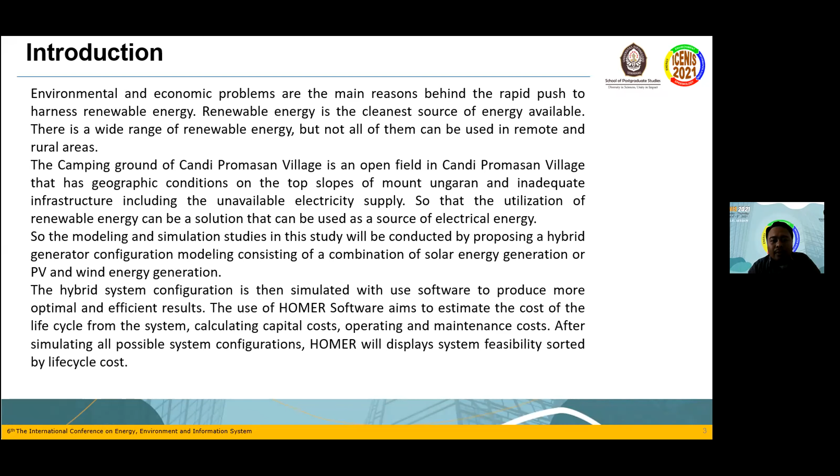The first introduction. Environmental and economic problems are the main reason behind the rapid push to harness renewable energy. Renewable energy is the cleanest source of energy available. There is a wide range of renewable energy, but not all of them can be used in remote and rural areas.

The camping ground of Candi Promasan Village is an open field that has a geographic condition on the top slope of Mount Ungaran and inadequate infrastructure, including unavailable electrical supply. So the utilization of renewable energy can be a solution that can be used as a source of electrical energy.

So the modeling and simulation studies in this study will be conducted by proposing a hybrid generator configuration consisting of a combination of solar energy and wind energy generation. The hybrid system configuration is then simulated with software to produce a more optimal and efficient result.

In this study, the research method used is first the electrical load study: survey data on electrical load profile including daily electrical loads and equipment load.

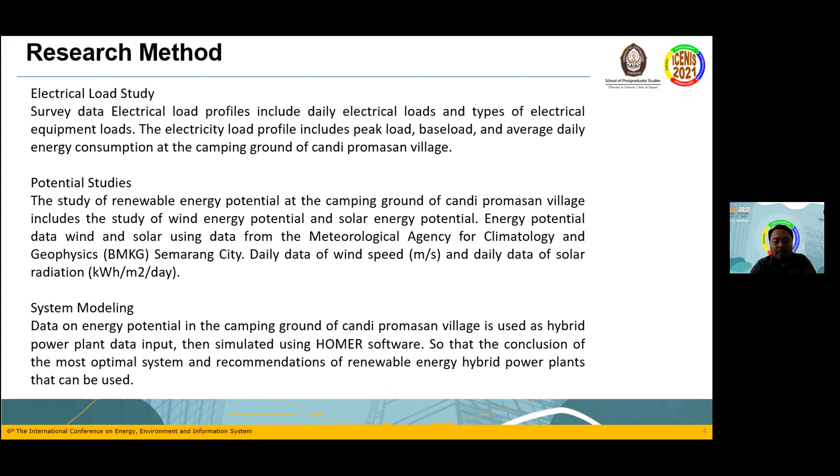Then the potential at the camping ground of Candi Promasan, including solar energy potential, was simulated using Homer software.

Result and discussion. First, the hybrid power generation system. The picture shows the hybrid generation system in Homer software. In the modeling, there are several components used as input data, namely daily load data, PV module, wind turbine, battery, and inverter.

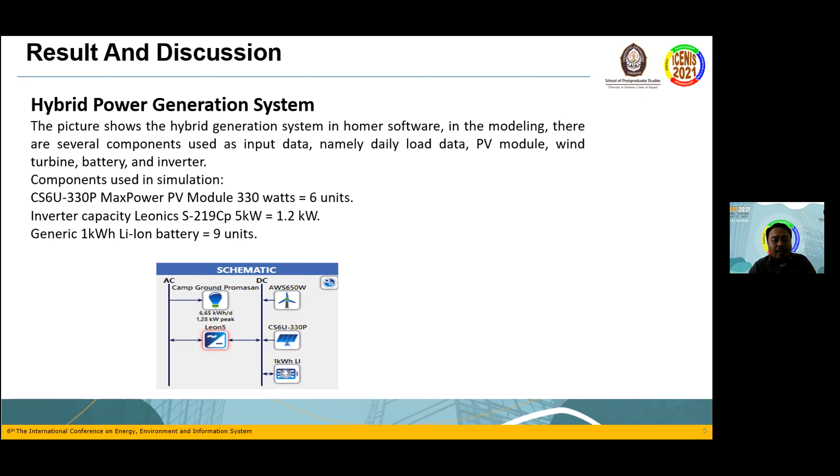Load profile: the image shows daily load data with an average daily load of 6.65 kilowatt hours and a daily peak load of 1.28 kilowatt. The annual load requirement is 2,427 kilowatt hours per year.

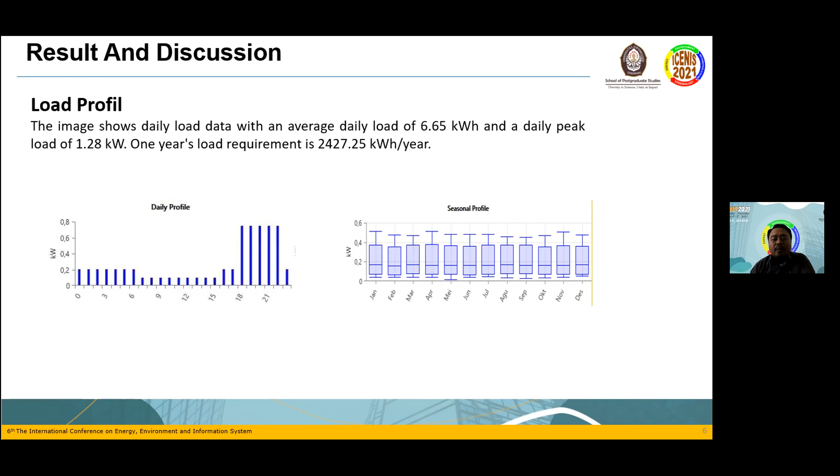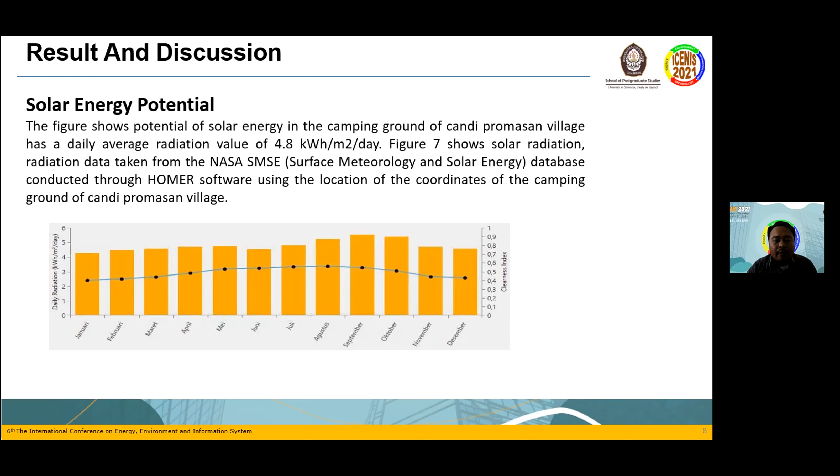Solar energy potential: the figure shows the potential of solar energy in the camping ground of Candi Promasan, with a daily average radiation value of 4.8 kilowatt hours per meter square per day.

Electric energy production: the figure below shows the best result obtained by Homer software, where the electricity supply uses 100% PV. The electricity generated by PV for 1 year is 6,247 kilowatt hours, so it can supply an annual load requirement of 2,427 kilowatt hours per year.

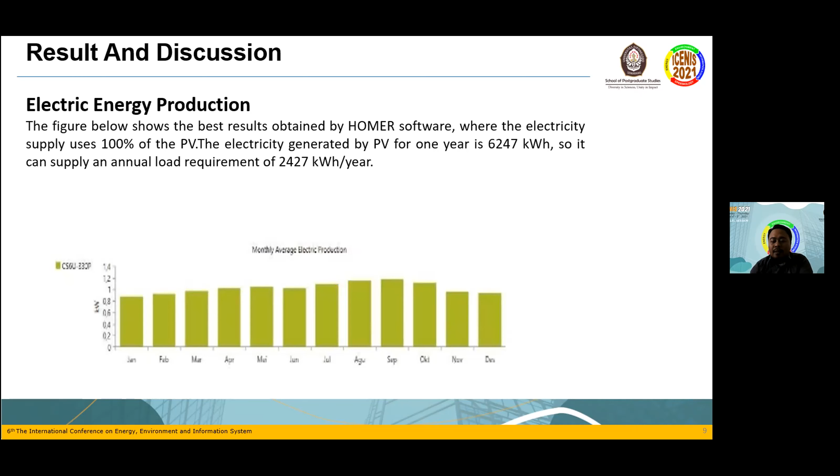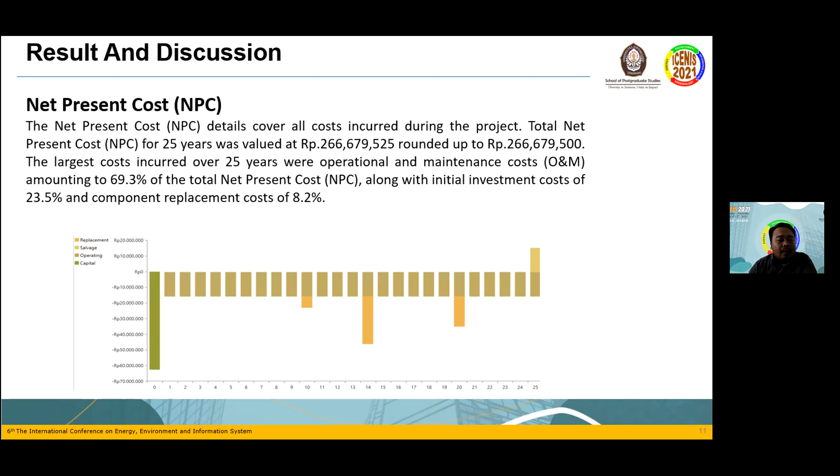Net present cost (NPC): the net present cost calculation covers all costs incurred during the project. Total net present cost for 25 years includes large costs where operational and maintenance costs amount to 69.3%, along with initial investment cost of 23% and component replacement cost of 8.2%.

Conclusion: the most optimal system for fulfillment of electrical energy needs in the camping ground of Candi Promasan village uses 100% of the PV system to meet the needs of electrical energy needed. The components required are 6 PV module units, an inverter capacity of 1.2 kilowatts, and 9 battery units.

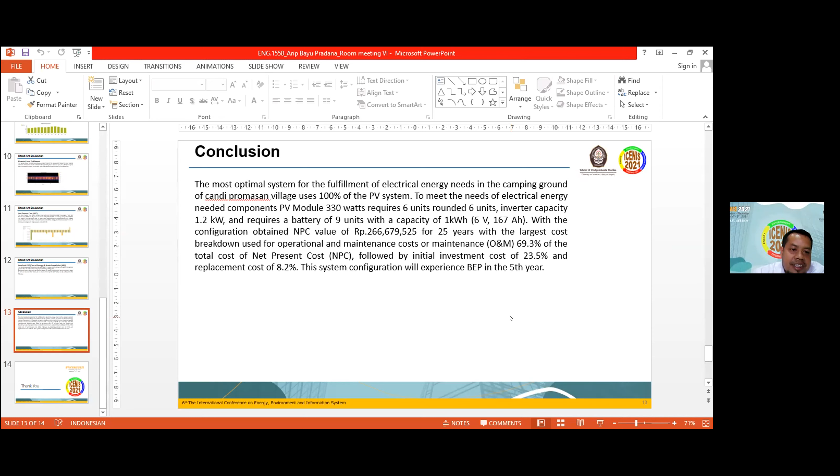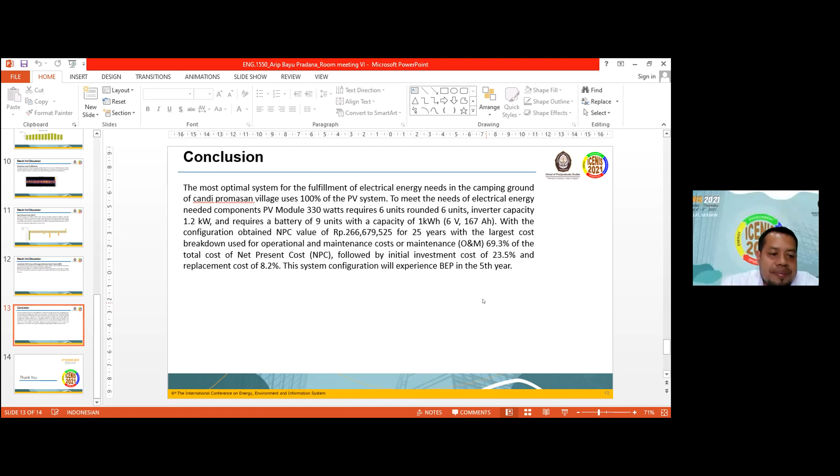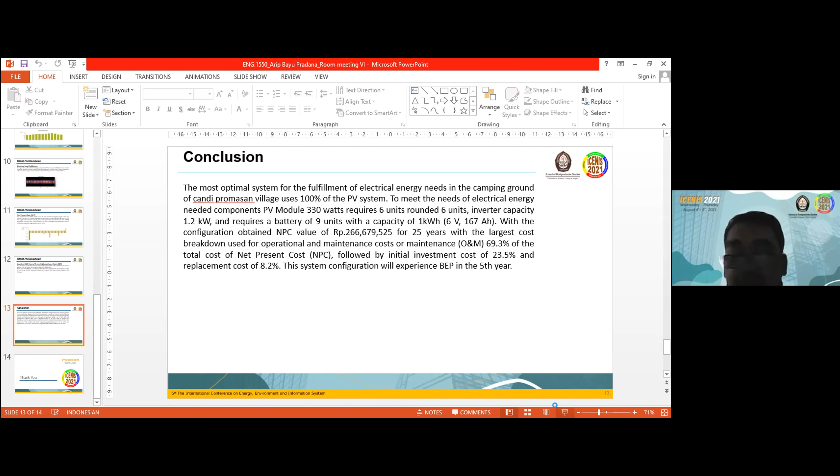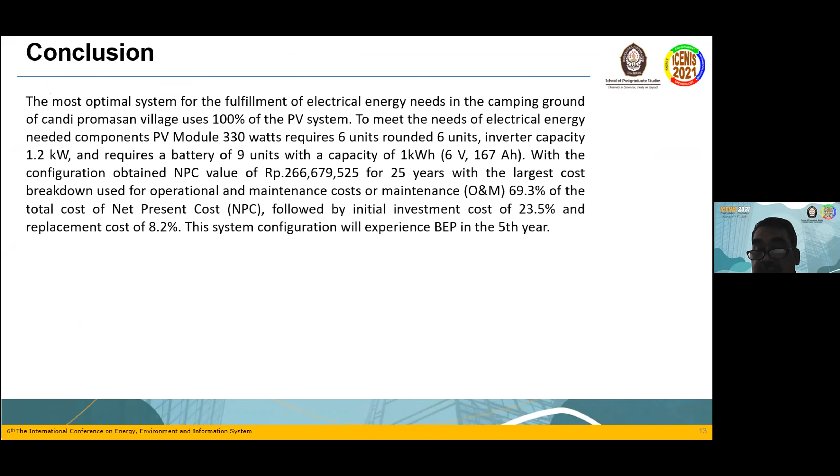Is the research still using the software simulation, not implemented yet? Not yet, I'm simulating in software. So maybe if implemented there may be a difference between the actual and the simulation output.

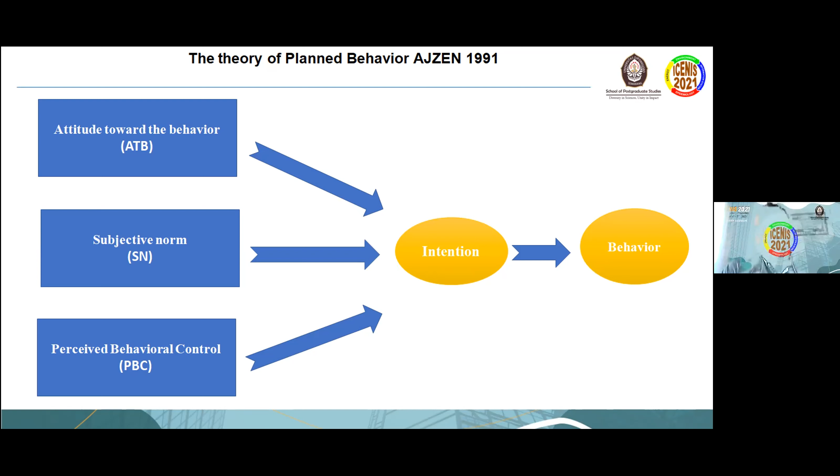The third predictor of intention is perceived behavioral control, which simply means the ability or perceived ability, ease or difficulty of performing a certain behavior.

We adopted this theory to explore farmers' intention to use energy saving settings, but we adapted this model by incorporating a fourth factor, which is environmental awareness.

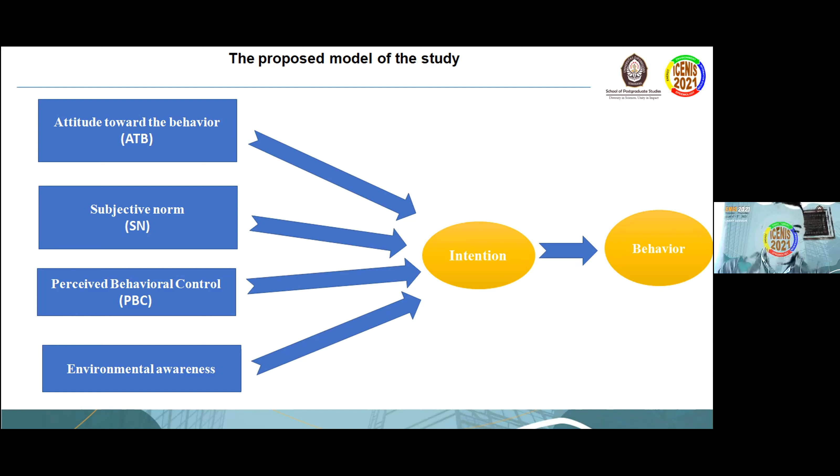To fulfill the purpose of the study, we hypothesized the following: attitude has a positive influence on farmers' intention to save energy.

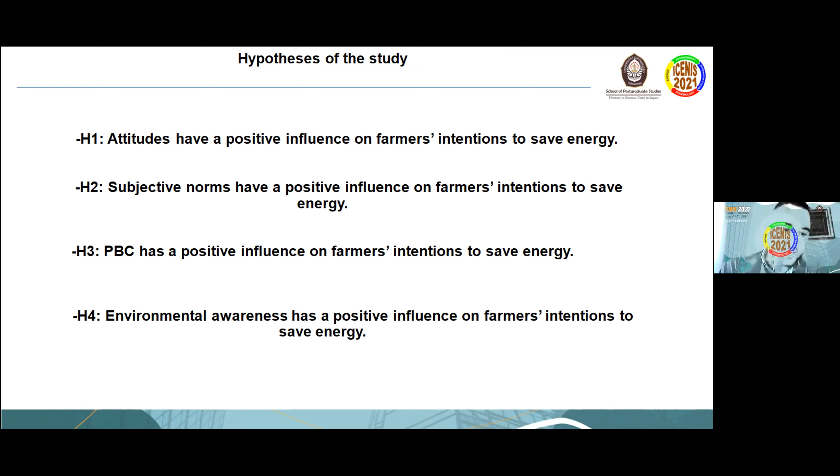Second, we suppose that subjective norms have a positive influence on farmers' intention to save energy, as does perceived behavioral control. Finally, environmental awareness has a positive influence on farmers' intention to save energy.

For the research methodology, data were collected through a self-administered questionnaire using the convenience sampling method. The population of the study includes landowners and land rental farmers in five of the most important Algerian provinces in terms of agricultural production. Data were collected from January to April 2020.

384 questionnaire copies were distributed through direct interviews and with the help of agricultural equipment retailers. We were able to retrieve 323 copies, of which 10 were found incomplete. So the analysis was ultimately conducted on 313 questionnaires, since the incomplete copies were excluded.

Results of the study: we found that a positive attitude toward energy saving behavior plays a significant role in forming energy saving intention. We also found that people who have influence on farmers, such as family, friends, and senior farmers, whose opinions and experience are appreciated and respected, exert a significant impact on farmers' decision to adopt energy saving settings.

We also found that perceived control is positively and significantly correlated with the intention to adopt sustainable agricultural practices. Finally, environmental concerns and awareness have a positive influence on farmers' intention to adopt energy saving settings.

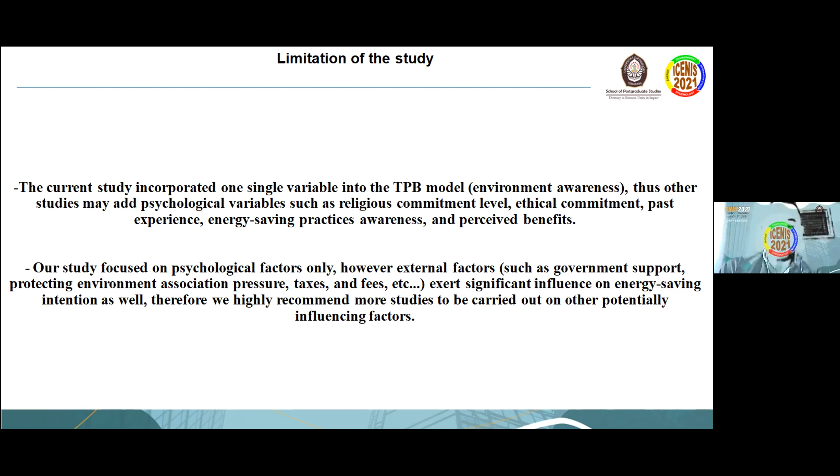However, external factors such as government support, environmental protection association pressure, taxes and fees exert a significant influence on energy saving intention as well. Therefore, we highly recommend more studies to be carried out on other potentially influencing factors.

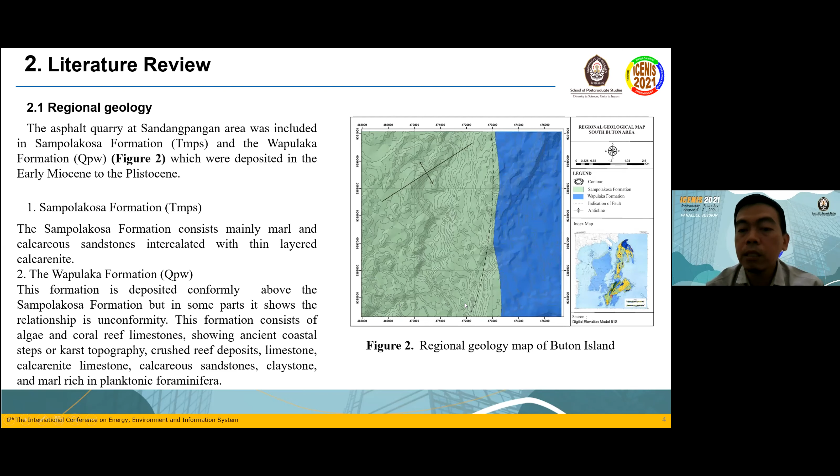This is the research area location. Then the literature review: first is regional geology. The asphalt quarry at Sandangpangan area is included in the Sampolakosa Formation and the Wapulaka Formation. The Sampolakosa Formation consists of marl, calcareous sandstone, intercalated with thin-layered calcarenite, while the Wapulaka Formation consists of algal and coral reef limestone, crushed reef deposits, limestone, calcarenite limestone, calcareous sandstone, claystone, and marl rich in planktonic foraminifera. This is the regional geology map of Buton Island.

The second topic is asphalt types. Asphalt are the varieties of naturally occurring bitumen. Asphalt are also produced as a petroleum byproduct. Based on where it is obtained, asphalt can be divided into two types: there is natural asphalt, which is obtained somewhere in nature and can be used directly or with light processing, and the second is oil asphalt, which is the residue of petroleum distillation.

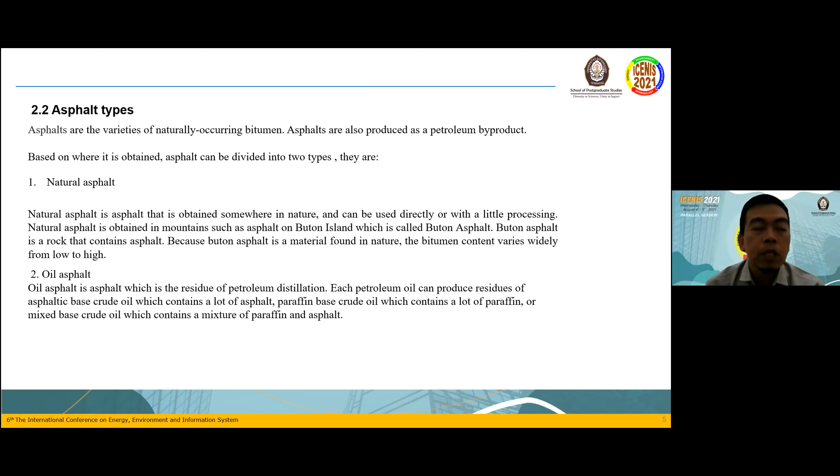Methodology. The methods used in this research are Soxhlet extraction, X-ray fluorescence (XRF) analysis, and petrographic analysis. Soxhlet extraction has traditionally been used for a solid sample with limited solubility in a solvent in the presence of insoluble impurities. This method was used to determine the bitumen and moisture content in Buton asphalt, while XRF was carried out to determine the chemical composition of rocks.

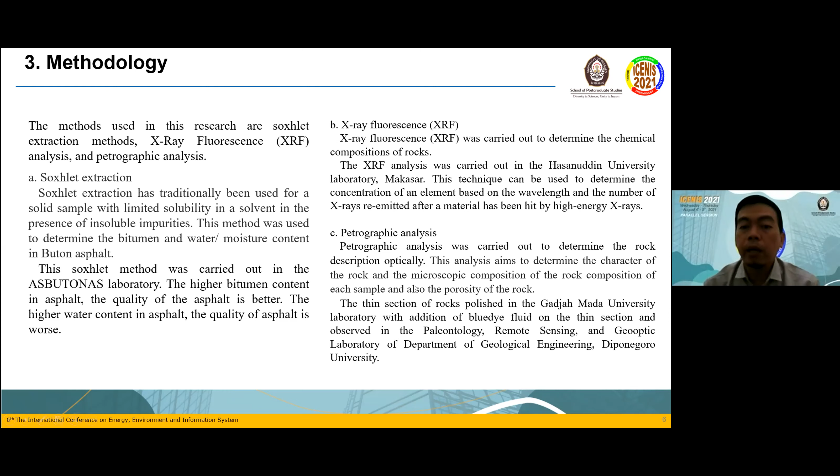Petrographic analysis aims to determine the character of the rocks and the microscopic composition of each sample, and also the porosity of the rock.

Result and discussion. The first is lithology. The lithology in the research area is limestone, which consists of calcarenite limestone from the Sampolakosa Formation, and bioclastic limestone and semi-crystalline limestone from the Wapulaka Formation.

Then bioclastic limestone. The bioclastic limestone covers about 10% of the research area, and from petrographic observation, the bioclastic limestone has porosity of about 5%, and it is filled with black asphalt.

Then the last is semi-crystalline limestone. Semi-crystalline limestone covers about 40% of the research area, and from petrographic observation, the semi-crystalline limestone has porosity of about 10%, which is filled with black asphalt.

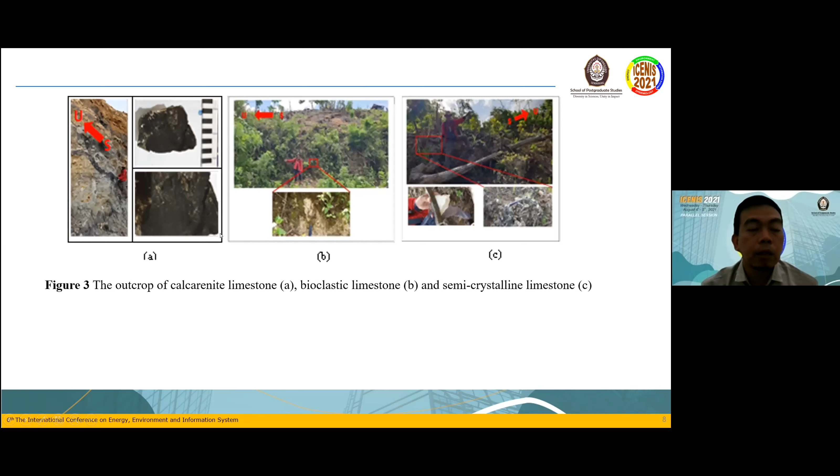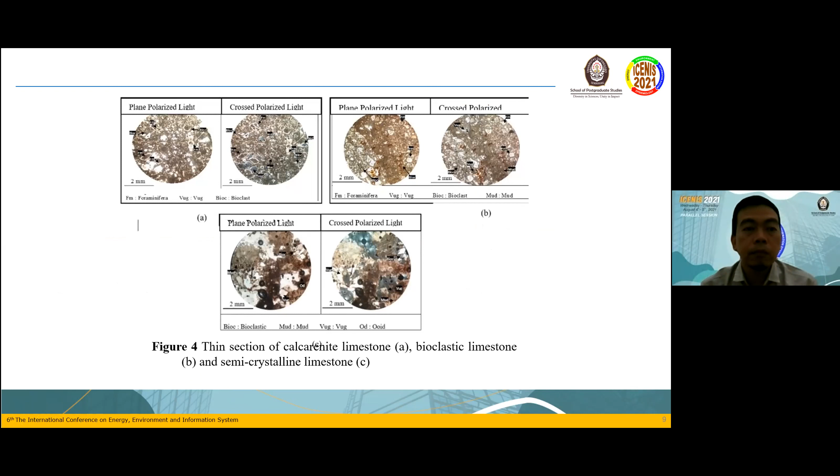This is the picture of the calcarenite limestone, bioclastic limestone, and semi-crystalline limestone, and this is the petrographic analysis from the rocks. Then the asphalt quality of the research area.

The determination of asphalt quality in the research area, based on the result of bitumen and water content tests, XRF analysis, and petrographic observation of the asphalt-bearing rocks, can be seen in Table 1.

These are 3 types of lithology: calcarenite limestone, sample number 1, 2, and 3; then bioclastic limestone, sample number 4 and 5; and semi-crystalline limestone, sample number 6. And this is the bitumen content, water content, CaO content, and porosity of each rock.

The discussion: the bitumen content. The bitumen content of the asphalt-bearing rock is analyzed with the Soxhlet method, and based on Badan Standarisasi Nasional, rocks with bitumen content of 18 to 24% were categorized as good.

And the rock in the research area, sample number 2 and number 3, which are calcarenite limestone, have the highest bitumen content compared to other rocks, bioclastic limestone and semi-crystalline limestone.

Then the water content: based on Badan Standarisasi Nasional, rocks with water content less than 16% were categorized as good, and all samples from the research area have less than 16% moisture content. So the water content of Buton asphalt is very, very low.

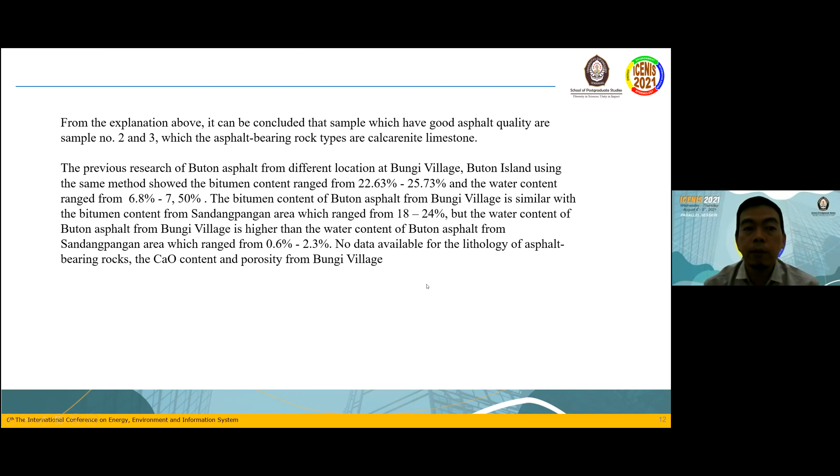Conclusion: the lithology of the research area is limestone, which consists of calcarenite limestone, bioclastic limestone, and semi-crystalline limestone. The bitumen content of calcarenite limestone is 4.5 to 38.5%, bioclastic limestone is 3.8 to 14.6%, and semi-crystalline limestone is 14.6%.

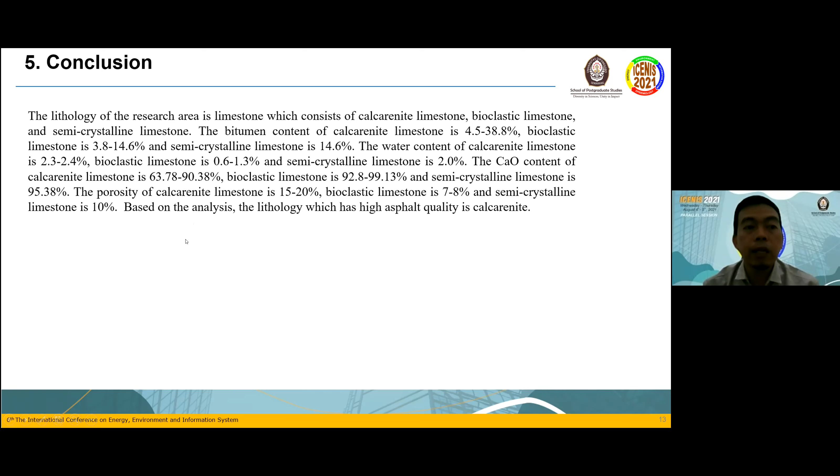The CaO content of calcarenite limestone is 63.78 to 90.38%, bioclastic limestone is 92.8 to 99.13%, and semi-crystalline limestone is 95.38%. The porosity of calcarenite limestone is 15 to 20%, bioclastic limestone is 7 to 8%, and semi-crystalline limestone is 10%.

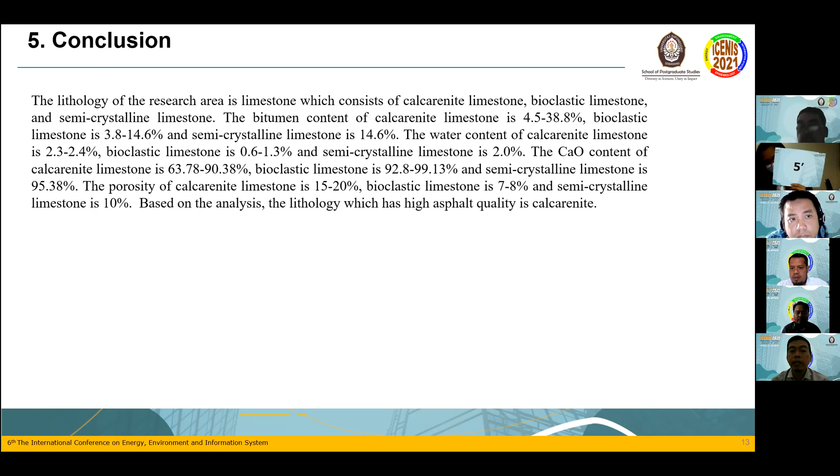Based on the analysis, the lithology which has high asphalt quality is calcarenite limestone. And this is the references we used in this research. Thank you.

Thank you very much, Mr. Triwinarno, for your presentation. It is very good research on the asphalt at Buton Island. Maybe any question or suggestion from the participants?

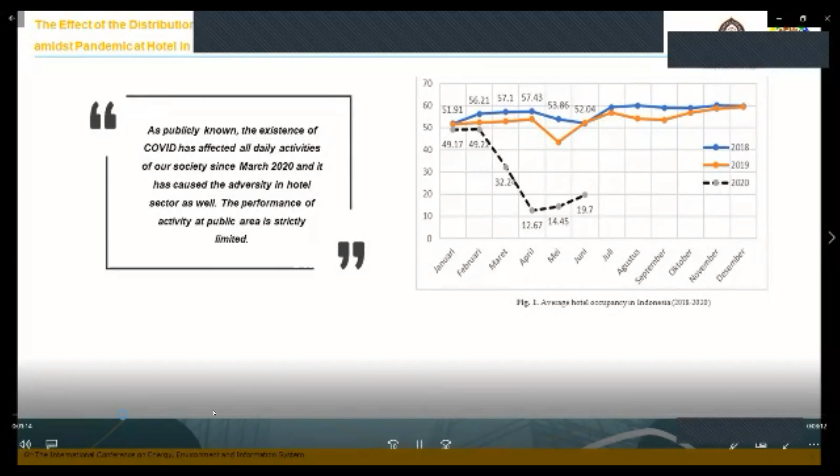Thank you. According to statistical data, the hotel condition in each province has not much difference, like the occupancy profile of star hotels in Central Java province, which has decreased by an average of 18.7% in 2020 compared to the occupancy rate in 2019 and 2018.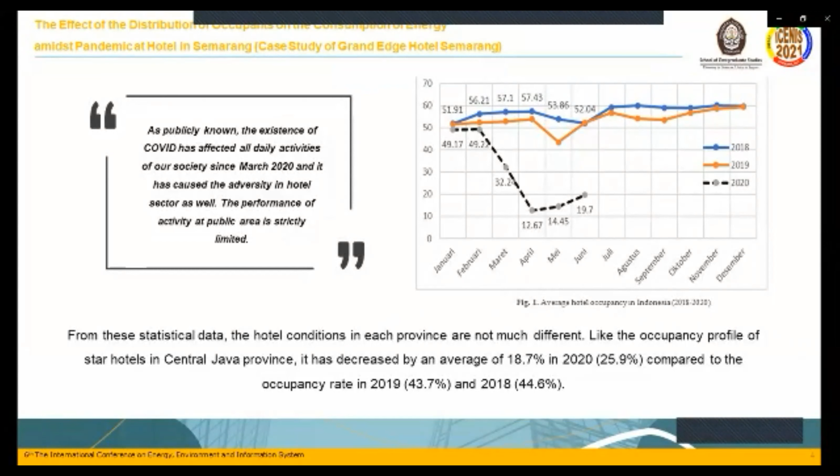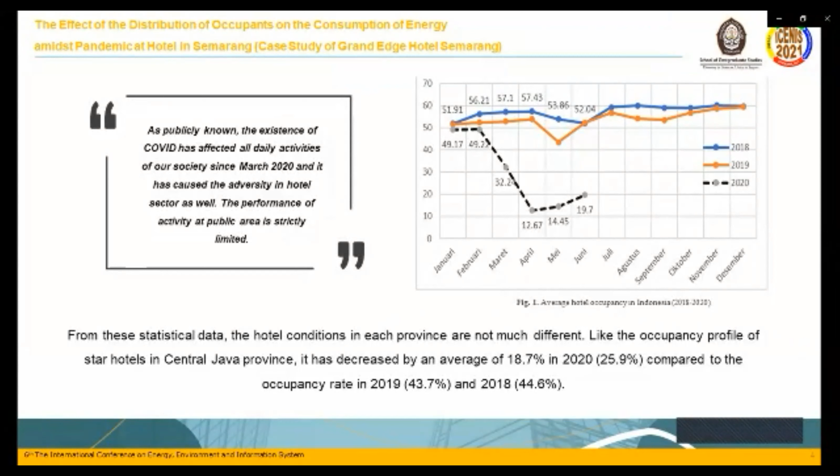Of course, a low occupancy rate will result in an imbalance between operational costs and hotel revenues. By trying to stay operational, hotels will suffer a lot of losses. Hotel management policies are of course inseparable from consideration of the efficiency and effectiveness of all aspects of hotel management, such as energy costs.

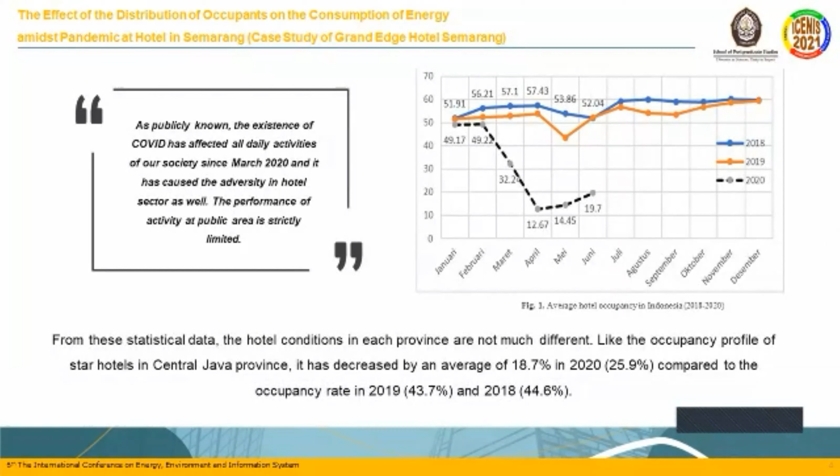There are 4 groups of variable use, namely energy, hotels, COVID, and tropical climate. Finally, the 2 main objectives in this discussion are the profile of energy consumption before and during the pandemic in hotel buildings, and whether there is any relationship between climate aspect, morning sunlight, and the choice of hotel room location.

To meet the above objectives, we carried out direct field measurements from January 2019 to December 2020 and used secondary data on visitor profiles as well as mathematical calculation of their energy consumption. This means there were 3 groups of steps we took in obtaining the field data: analysis of hotel room user profiles, energy use analysis, and analysis of the choice of hotel room location during a pandemic.

This means there were 4 groups of steps we took in obtaining the field data. First, building energy data. Second, hotel building physical data. Third, non-physical data of hotel buildings. Fourth, hygrothermal profile based on room location orientation.

The object of this observation is Grand Edge Hotel, located on Sultan Agung 96, Semarang. This hotel building has a principal orientation toward the west, with the main entrance on the west side and side entrances on the south and north sides of the building.

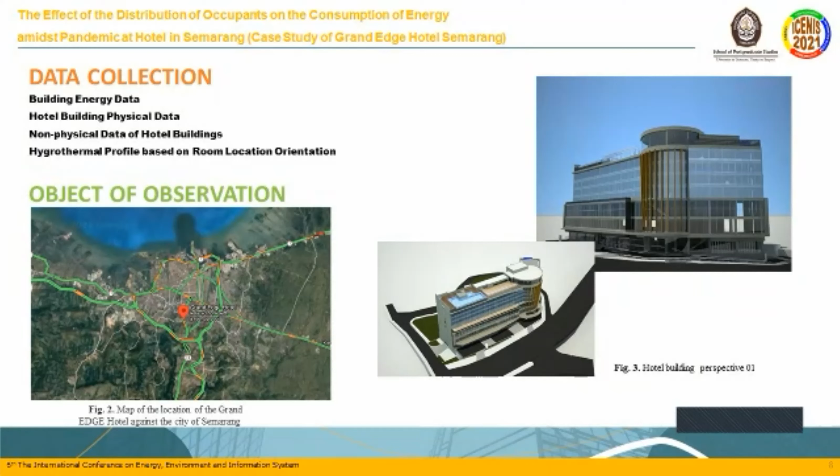This hotel, about 80%, uses a glass material facade of double-tempered laminated blue glass, 6mm plus 6mm, located in almost all orientations of the building. The main tool used in this research is the Hygrothermo data logger. For the technical field measurements, 4 pieces of the tool were needed, placed on the exterior and interior of 2 different room locations: east-west and north-south.

It can be seen from the table that during the pre-pandemic era, the largest occupancy profile occurred in July with 3,506 rooms, and the lowest in May with 2,289. An average of 114 rooms per day was occupied in July.

114 rooms out of 118 rooms equals 97% occupancy, and an average of 74 rooms per day was rented in May.

74 out of 118 rooms equals 64% occupancy. Figure 5 visualizes the downturn in the pandemic era.

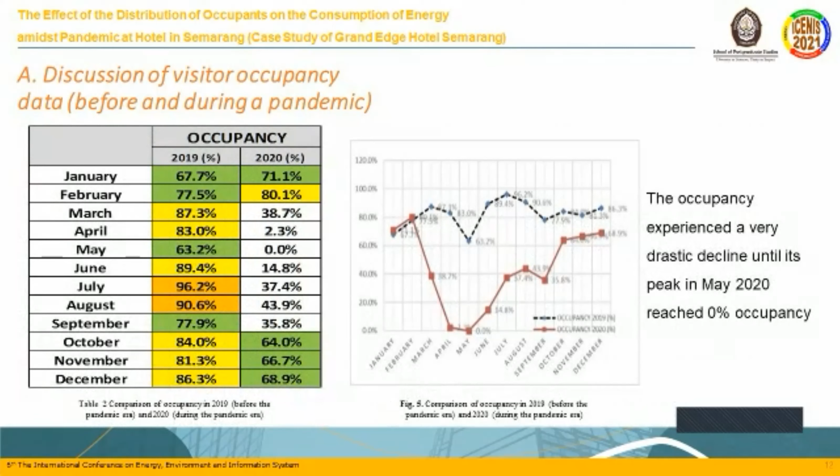The decline in occupancy rates began in March 2020 until it reached its peak. The hotel had to be closed until June 2020. The hotel life slowly revived until the end of 2020, even though hotel occupancy was still far from normal, amidst government support via circular letter to start opening public facilities for public under strict health protocol.

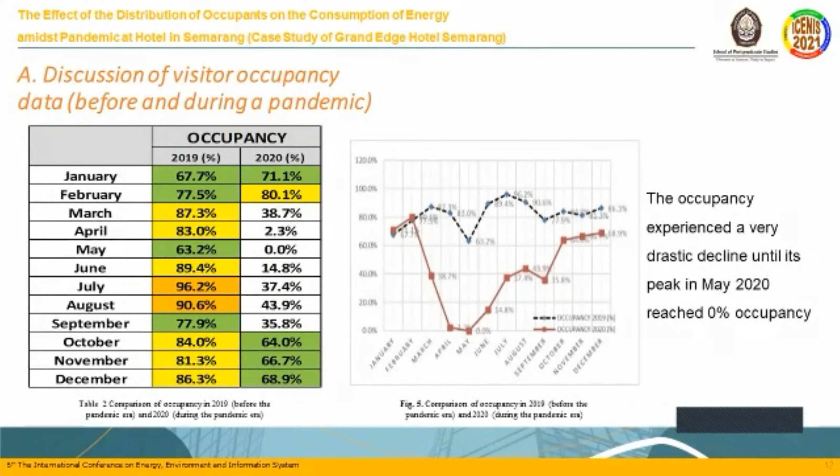We are limited to calculating the recap total level of electrical energy consumption from the electricity needs of the room units and some of its supporting facilities. We compare the difference in electrical energy needs that occurred in 2019 with the energy needs that occurred in 2020 in this pandemic era. The limitation of electricity needs focuses on the energy used in the room unit and its supporting facilities only. The need for electrical energy in each room can be seen in table 3.

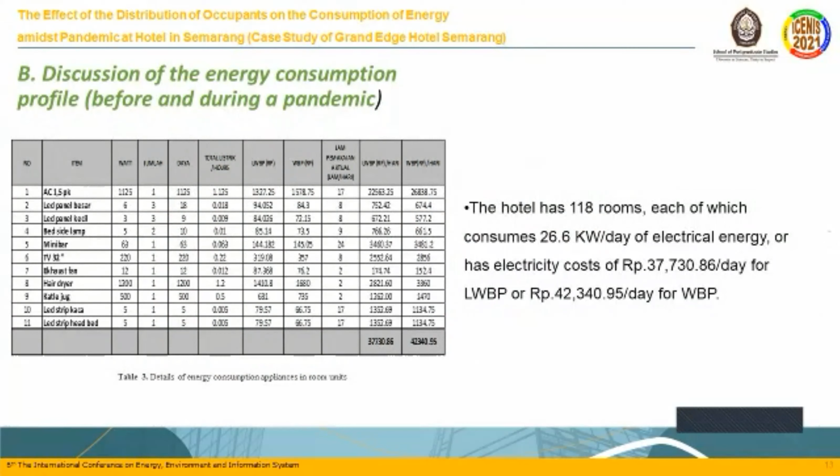If we take into account the effect of decreasing hotel room occupancy in 2019 and 2020, the percentage of the decline is significantly identical to the quantity of hotel room occupancy. From 2019 to 2020, they experienced a deficit reduction in the cost of electrical energy by 47%.

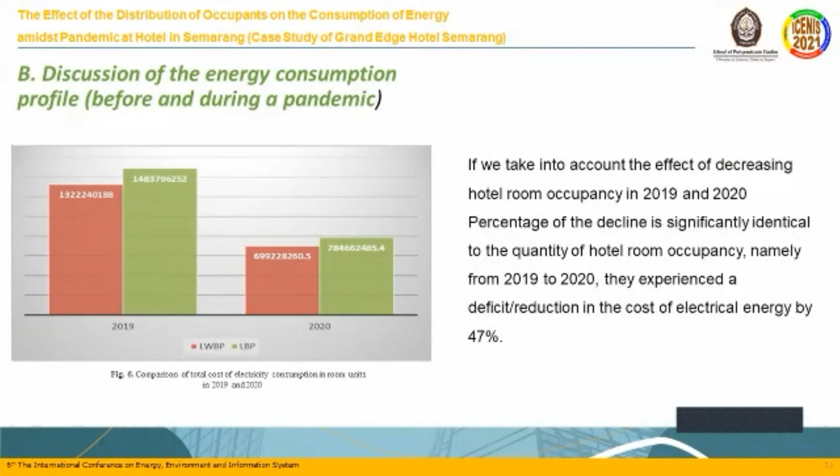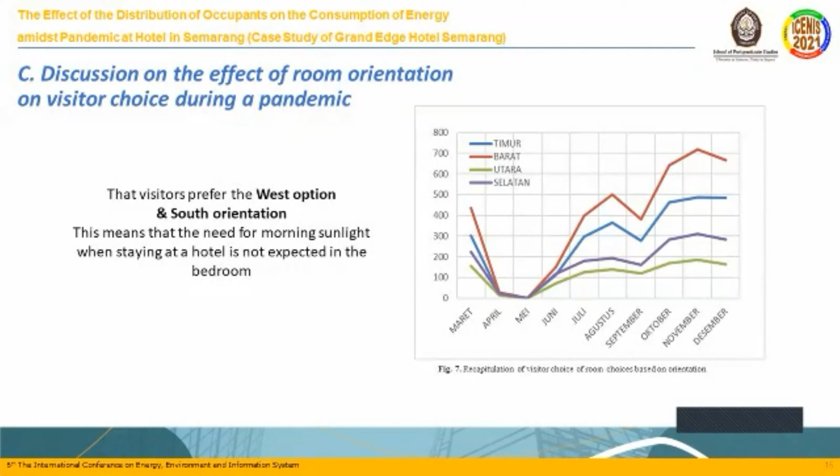If we compare the choice of west and east orientation, it turns out that visitors prefer the western option. Whereas for south and north orientation rooms, the choice of many visitors is the south orientation. When related to this pandemic condition where people take advantage of the morning sun and try to get the maximum natural air circulation, this doesn't appear in the room choice.

When associated with visitor choices based on room orientation, the most chosen orientations, west and south, have lower average daily temperatures. Regarding energy consumption, looking again at the architectural design of the Grand Edge Hotel room, which was designed closed, meaning all rooms are designed to be fully facilitated with the use of air conditioning, the rooms for west and south orientation have a lower cooling load than the east and north oriented ones.

The ratio of humidity profile to room for 24 hours from the 4 orientations is relatively linear, with the highest sequence of daily average air humidity being the south orientation room and west orientation room, about 62 to 66% average daily humidity, while north and east orientation rooms are relatively the same, around 54 to 55% average daily humidity.

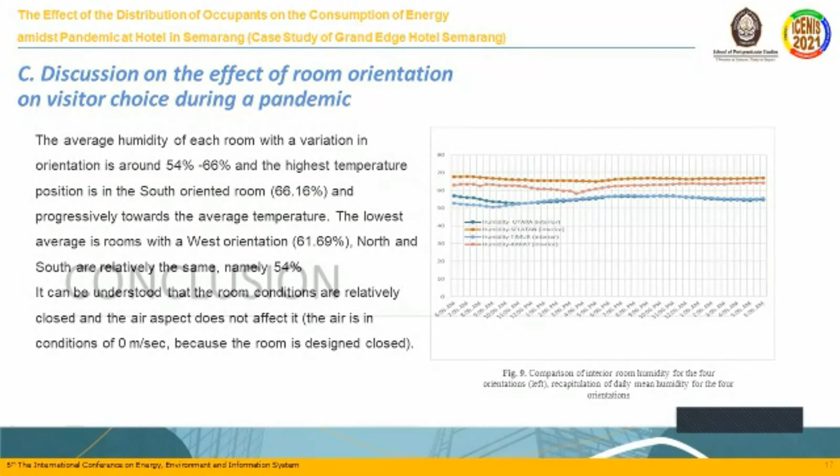That brings us to the end of our presentation. In brief, Grand Edge Hotel is one of the star hotels located in the city of Semarang. During pandemic conditions in May 2020, the occupancy rate decreased significantly. The effect of this pandemic also had a significant impact on the consumption of electrical energy. The rise of hotel occupancy rates is very slow, even by December. Many government outputs related to health programs have also played a role in reviving the operation of the star hotel.

I sincerely appreciate your attention today. If you have questions regarding the focus of this presentation, please feel free to contact us.

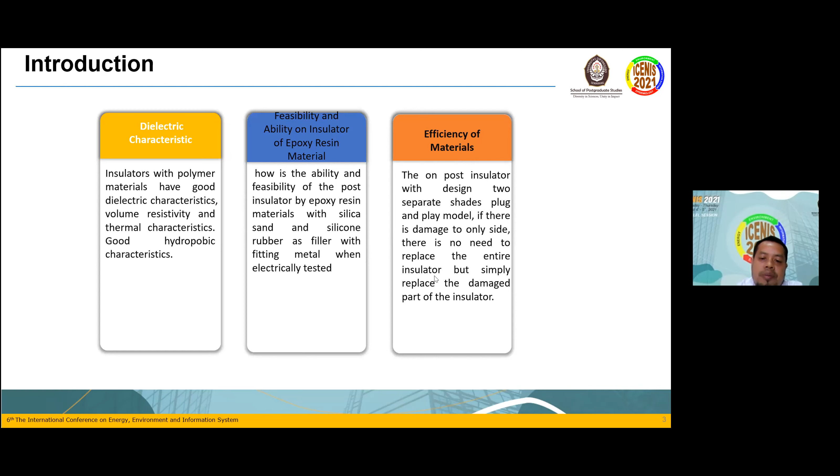Insulating material: insulating is the nature of the material that serves to electrically separate adjacent voltage electric transmission, so that there is no leakage of current, no flash over arcing or spark over.

Insulator characteristic consists of 2. First, electrical characteristic: an insulator must be resistant to be able to withstand an electric voltage, and a good insulator must have a large dielectric strength, and mechanical characteristic.

The insulator mixed material consists of post insulator of epoxy resin material. First, resin epoxy, because of good dielectric characteristic, volume resistivity, good thermal characteristic, and hydrophobic property. Second, silicone rubber, because of high hydrophobic, low surface conductivity, and the like. And last, silica sand, to increase the mechanical value of the material.

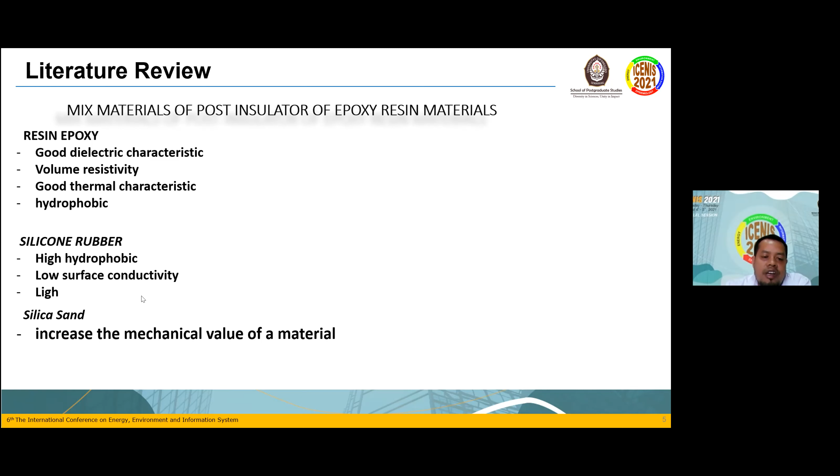Insulator feasibility parameter A: creepage distance and arc distance characteristics. Creepage distance is the total distance of the insulator, or the tracing of the insulator surface that connects to the conductive part of the insulator with the bottom of the conductive insulator. This figure describes creepage distance.

B: resistivity insulation capability, to determine the condition of the insulation of an electrical equipment for safe operation. According to VDE standard, 1 kilovolt equals 1 megaohm. This figure shows the insulator resistant insulation testing.

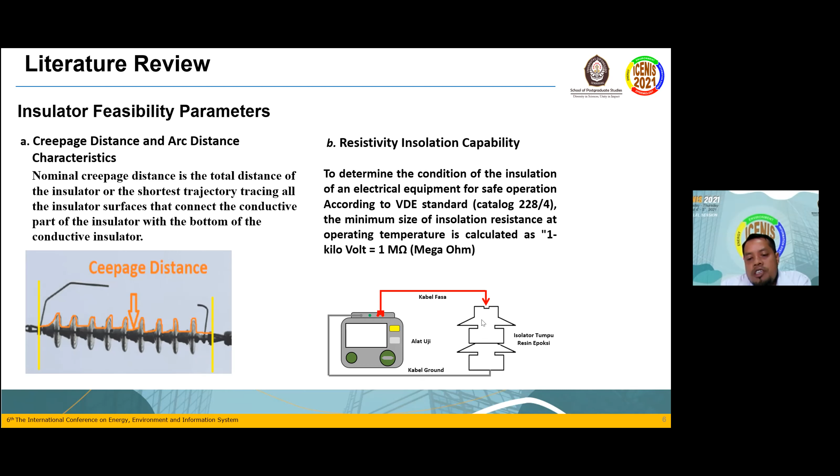C: Hi Pot test capability. Purpose of the HV test is to determine if there is a current leak when the insulator is supplied with direct voltage, with supply of 35 kilovolt. And D: power frequency withstand voltage capability, or breakdown voltage, to determine the dielectric strength of the insulator against high voltage.

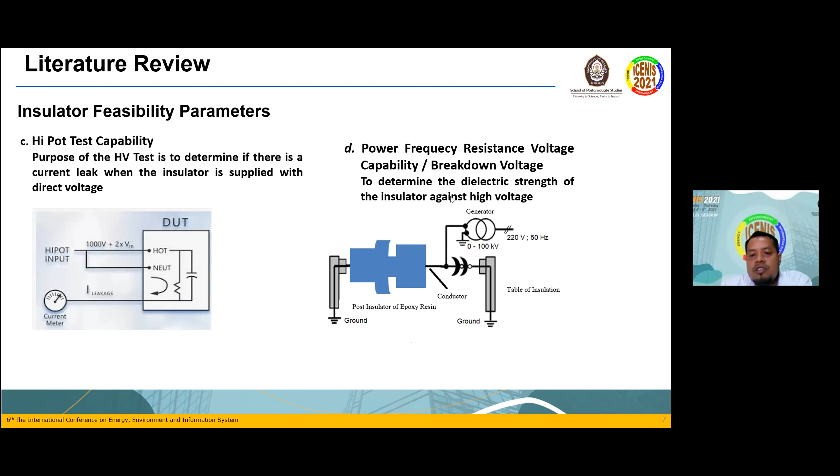Research steps: mix of the material - epoxy resin 35%, hardener 35%, silica sand 15%, silicone rubber 15%. With electrical test of insulator: creepage distance, arc distance, insulation resistance, HV DC test, and Hi Pot and breakdown voltage.

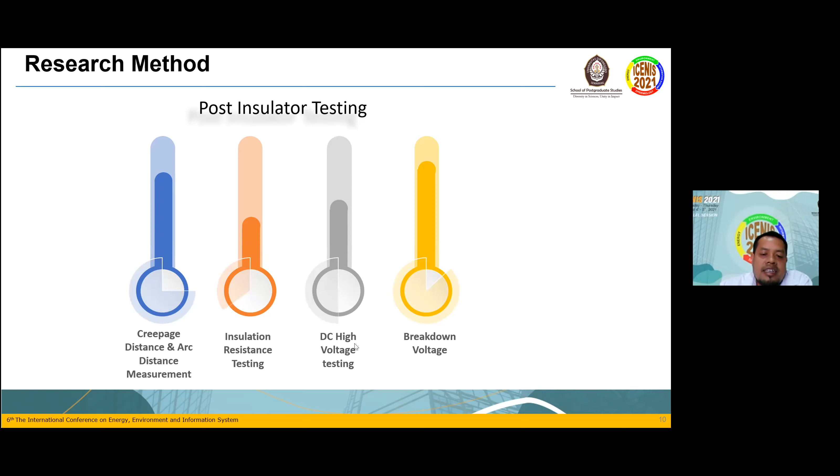Epoxy resin insulator design: insulator top design and insulator bottom design, with testing of creepage distance, arc distance, insulation resistance testing, DC high voltage testing, and breakdown voltage.

Creepage distance and arc distance measurement. This figure shows the method of creepage distance measurement, and this figure shows the method of arc distance measurement.

Insulation resistance testing: test with a voltage of 5 kV carried out for 1 minute at each test point with 3 repeats. This includes phase-to-ground insulation resistance testing, part of top insulator to ground insulation resistance testing, and part of bottom to ground insulation resistance testing.

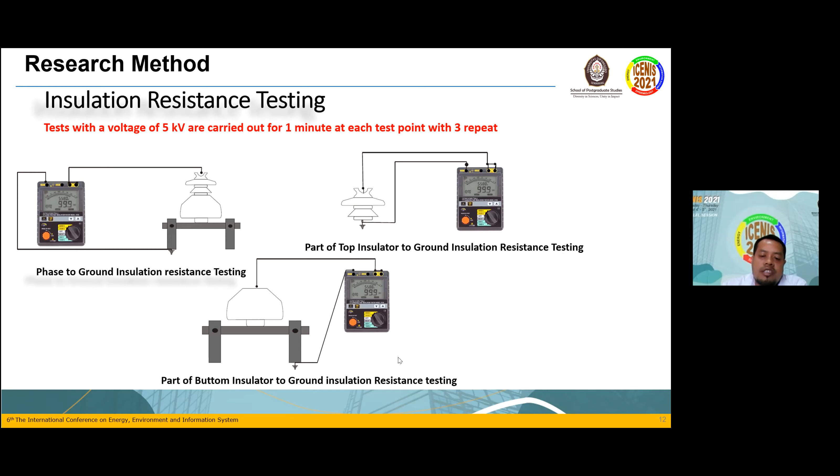Then the DC high voltage testing, or hi pot testing, runs for 10 minutes with a voltage of 35 kV, recording the result of the insulation resistance test and leak current every 1 minute. This is the post insulator designed to separate, and this is the test equipment.

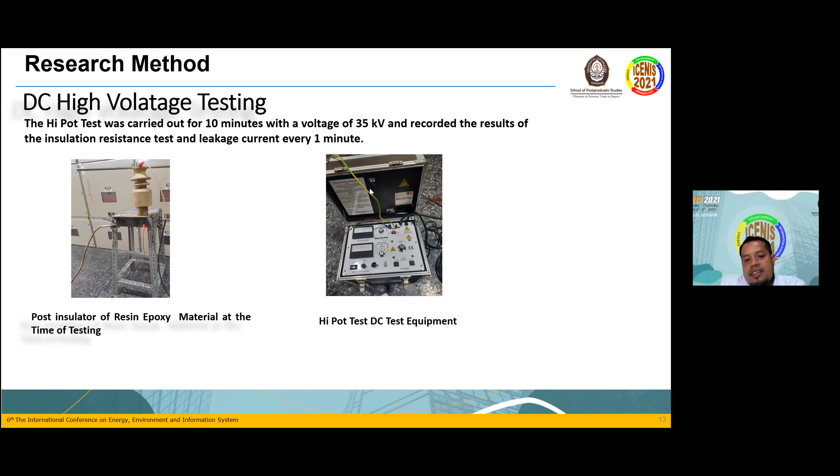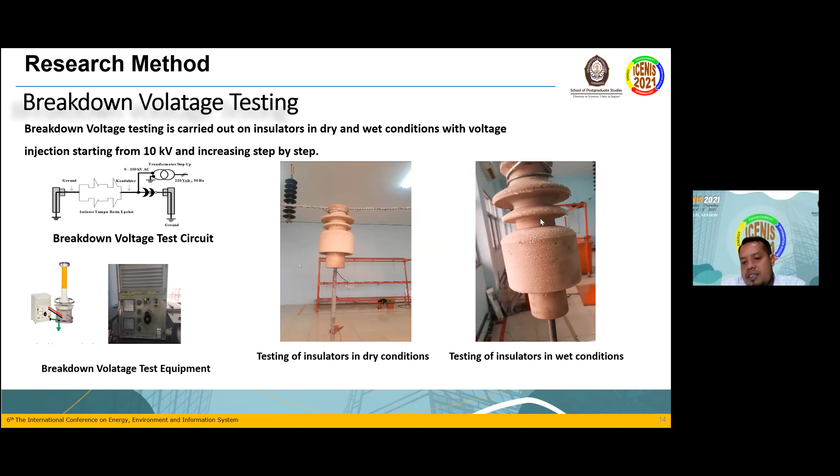And last, breakdown voltage. Breakdown voltage testing is carried out on insulator in dry and wet condition, with voltage injection starting from 10 kV and increasing step by step. This is a dry condition and this is a wet condition.

Result of measurement of creepage distance and arc distance. From measuring creepage distance, the result is 695 millimeter in the SPLN standard. The characteristic of the insulator creepage distance is more than 680 millimeter, and measuring the arc distance of the test object with result of 358 millimeter. According to the SPLN standard, the characteristic of the insulator arc distance is more than 270 millimeter.

This result of insulation resistance testing, referring to the SA 032 PST 1984 equipment book, is according to the VDE standard catalog. The minimum amount of insulation resistance at operating temperature is calculated as 1 kilovolt equal 1 mega ohm. With result of insulator with resin epoxy material, phase to ground, bottom insulator to ground, top insulator to ground, with result resistant insulation more than 1 million.

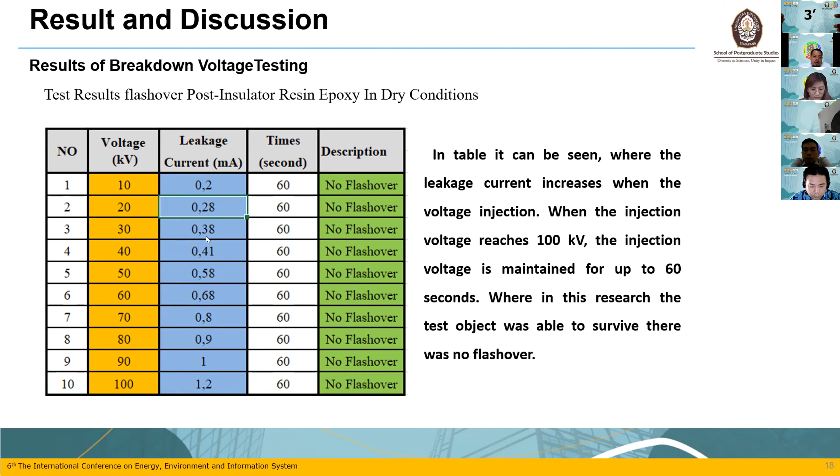Result of breakdown voltage testing, the result flashover post insulator resin epoxy in dry condition. In table can be seen where the leak current increase when the voltage injection. When the injection voltage reaches 100 kV, the injection voltage is maintained for up to 60 seconds. In this result the test object was able to survive, there was no flashover until 100 kV with leaky current 1.2.

Result of breakdown voltage testing in wet condition. When the injection voltage reaches 90 kilovolt for more or less 20 seconds, it turned out that the test object experienced a flashover. On standard SPLN, mention characteristic of power frequency withstand voltage or breakdown voltage with wet condition is 65 kilovolt. In this research of insulator, flashover at 90 kV with leaky current and time more or less 20 seconds.

Conclusion. Characteristic, the creepage distance result has a value of 695 millimeter, and the character arc distance of the insulator has a value of 358 millimeter. In SPLN, with a characteristic value of creepage distance more than 680 millimeter and characteristic arc distance of more than 270 millimeter, so that the research test object was in the feasible category.

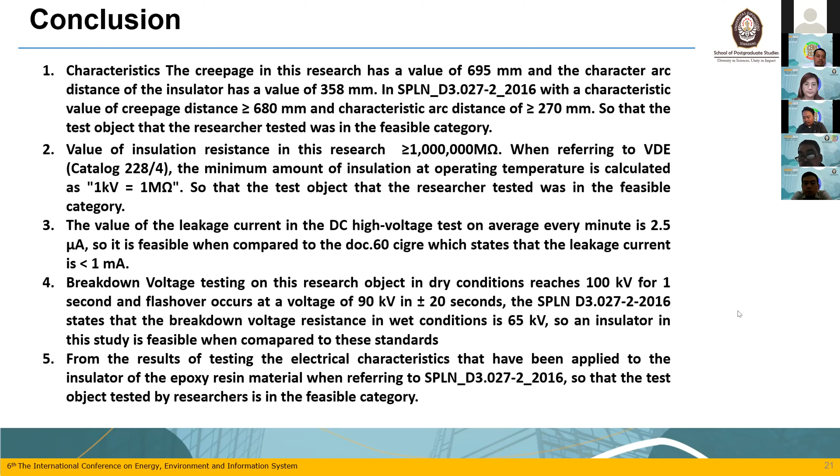Because injecting with 35 kV minute to minute will reduce the humidity. Maybe this is all, Mr. Bayu.

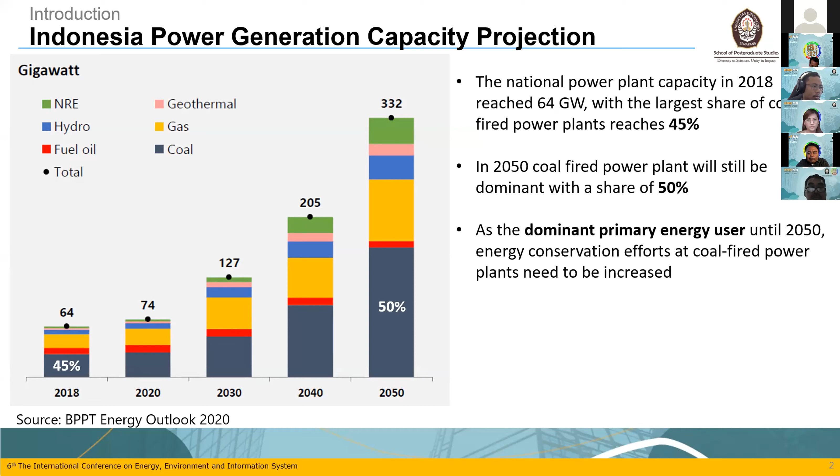Indonesia's power plant capacity in 2018 reached 64 gigawatt, with the largest share of coal power plant reaching 45%. Until 2025, for the business as usual scenario, it is predicted that there will be an additional power generation capacity of more than 32 gigawatt, or around 4.6 gigawatt per year. Coal and gas fuel plants each have a share of around 40%, and the remaining renewable-based power plants are 19%. It is predicted that in 2025, the total generating capacity will reach 96.4 gigawatt. In 2050, coal will still be dominant with a share of 50%. As the dominant primary energy user until 2050, energy conservation effort at coal-fired power plant needs to be increased.

Nowadays, the electricity problem is the limited supply of fossil energy and production cost components, which are dominated by fuel costs. Net plant heat rate is the required energy amount of a thermal power plant to generate 1 kilowatt-hour of net electricity. Net plant heat rate is expressed in kilocalorie per kilowatt-hour.

One of the coal-fired power plants located in Indonesia was operating commercially in 2013. It has a commissioning result of net plant heat rate value of 3026 kilocalorie per kilowatt-hour at 65 megawatt gross load. While the accumulative net plant heat rate result from the last 6 months on the commercial report is 3,812 kilocalorie per kilowatt-hour. Heat rate commissioning calculation uses an indirect method, while the heat rate calculation for commercial report uses a direct method, so that the difference in method affects the accuracy of the heat rate calculation results.

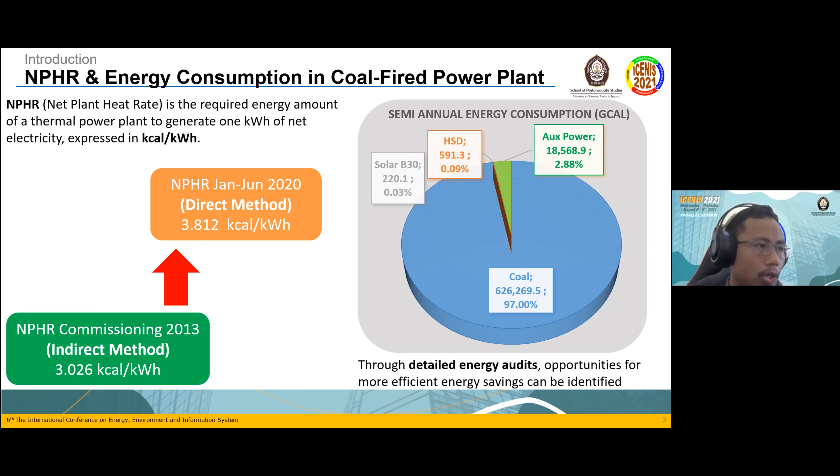This plant's most dominant energy source is coal, with 97% of the total energy source used. The detailed energy audit is done by performance test procedure based on ASME PTC standard. The performance test is conducted to identify equipment performance degradation, and the data recording is taken at maximum net dependable capacity, which is 55 megawatt net load, or equal with 61 megawatt gross load.

Boiler efficiency calculation uses heat loss method based on ASME PTC number 4, and turbine heat rate calculation based on ASME PTC number 6. There are two bases for turbine heat rate calculation: gross power basis and net power basis. Turbine heat rate is the amount of energy required by steam turbine and generator to produce 1 kilowatt-hour of electricity. Net plant heat rate can express the overall energy performance indicator of the power plant.

Net plant heat rate calculation is based on ASME PTC number 46. For other equipment performance, such as turbine isentropic efficiency calculation, it is based on ASME PTC number 6A. Feed water heater performance calculation is based on ASME PTC 12.1. And lastly, air preheater performance calculation is based on ASME PTC number 4.3.

Heat rate deviation analysis aims to identify and quantify the factors that cause heat rate to increase by comparing operating parameters that affect change in heat rate and main equipment performance between actual performance test and commissioning performance test values. Identifying and quantifying heat rate change factors use manufacturer correction curves and heat rate handbook by a certain company.

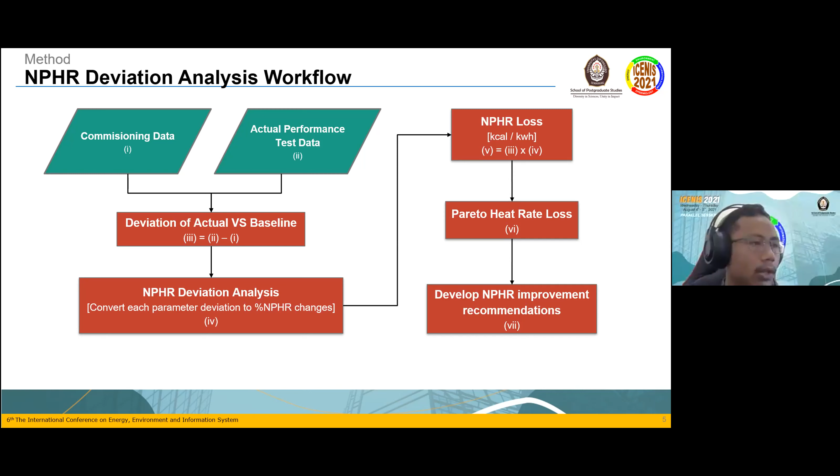A certain company's heat rate handbook divides heat rate loss type into 4 categories: operator controllable, plant controllable, turbine cycle, and boiler components.

At the same load, the actual performance test heat rate increase compared to the commissioning was 510 kilocalorie per kilowatt hour, or 16.9%. This increment is due to the boiler efficiency decreasing by 0.78% and turbine heat rate increasing by 371 kilocalorie per kilowatt hour. Identified heat loss was 506 kilocalorie per kilowatt hour, while the unidentified loss was 3.8 kilocalorie per kilowatt hour.

Annual fuel cost increase obtained is 1.2 million USD due to the actual heat rate increase compared to the commissioning value.

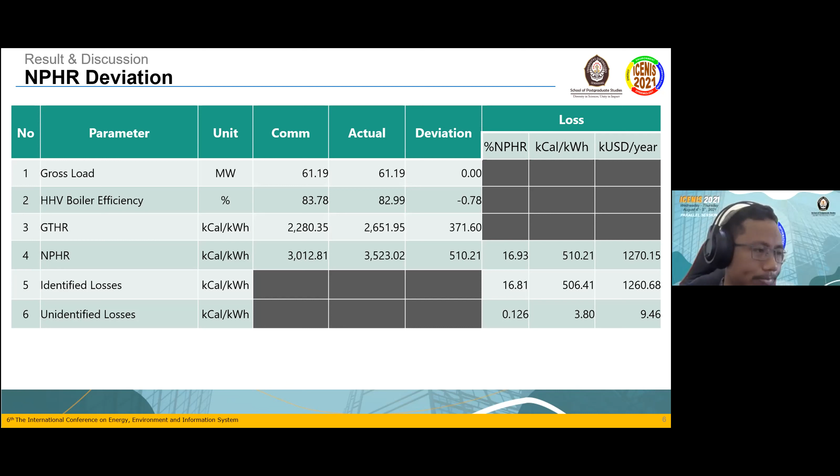The result of heat rate deviation analysis is the most significant increase in heat rate was due to condenser pressure increase by 9.9 kilopascal. Possible causes of the condenser pressure increase are air in-leakage, excess condenser load, tube fouling, low circulating water flow, tube plugging, air binding, and increased cooling water inlet temperature.

The second significant cause is the turbine isentropic efficiency decrease by 2.3%. Possible causes of the decrease in turbine isentropic efficiency are mechanical damage, mechanical blockage, blade deposits, spill strip, turbine stick erosion, gland seal leakage, and main stop valve leakage.

Another cause is heat rate increase was also caused by a rise of terminal temperature difference, or TTD, of high pressure heater number 1, high pressure heater number 2, and low pressure heater number 4. In addition, low pressure heaters number 5 and 6 being out of service due to extraction valve failure also contributed to turbine heat rate increase.

Lastly, the most significant boiler efficiency reduction factor is due to dry gas losses increase. These losses are caused by air preheater effectiveness decrease and air preheater leakage increase. A decrease in air preheater effectiveness can be caused by pipe corrosion, pipe plugging, and pipe leaks.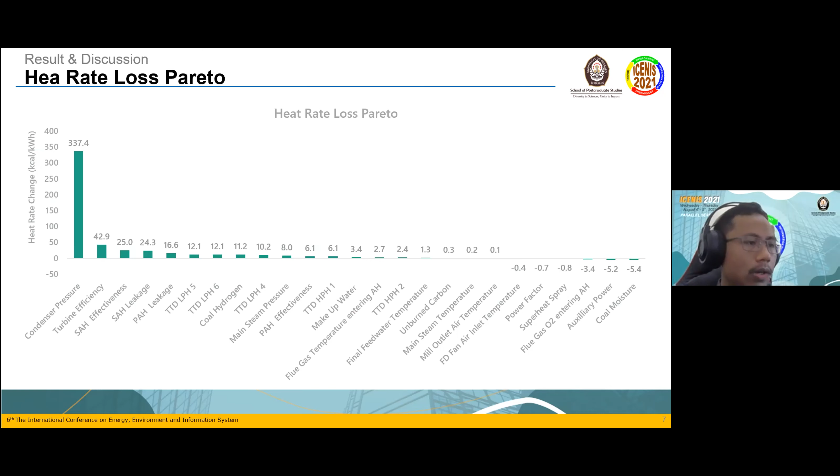Meanwhile, a decrease in secondary air heater effectiveness can be caused by heating element corrosion, heating element deformation, and heating element blockage. An increase in primary air heater leakage was caused by leakage of pipe heat exchanger, which can be due to fly ash erosion or corrosion. Meanwhile, an increase in secondary air preheater leakage can be caused by radial air seal or axial seal air heater gap being too wide.

The heat rate improvement recommendations are established based on data analysis and observation results. The recommendations for heat rate improvement in the turbine and boiler system area include operating parameter optimization and equipment repair or replacement. The priority for implementing recommendations is easy implementation that can be done within 1 year and at no cost. Meanwhile, for recommendations that take more than 3 years, the organization must plan the budget immediately.

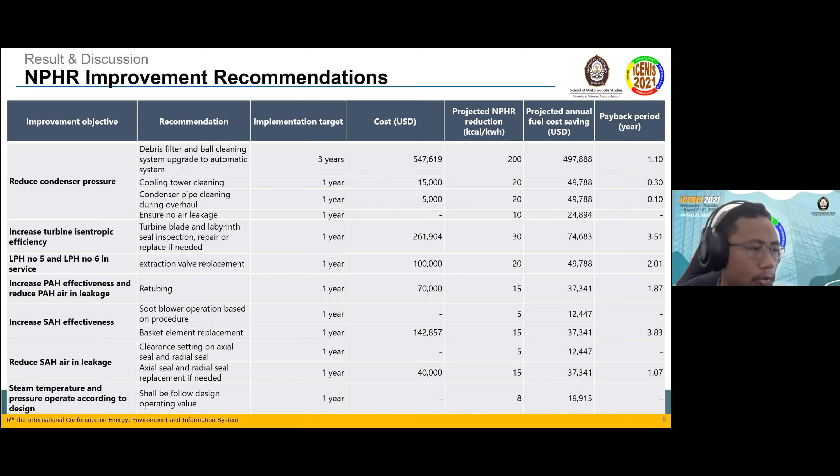The projected heat rate reduction, if all recommendations are implemented, is approximately 363 kilocalorie per kilowatt hour, equivalent to fuel cost savings of 903,000 USD per year, with a total improvement cost of 1.1 million USD.

The conclusion of our research is actual heat rate increased by 510 kilocalorie per kilowatt hour, or 16.9%, compared to commissioning value. This increment is due to boiler efficiency decreasing by 0.78% and gross turbine heat rate increasing by 371 kilocalorie per kilowatt hour. Identified heat loss was 506 kilocalorie per kilowatt hour, while the unidentified losses were 3.8 kilocalorie per kilowatt hour.

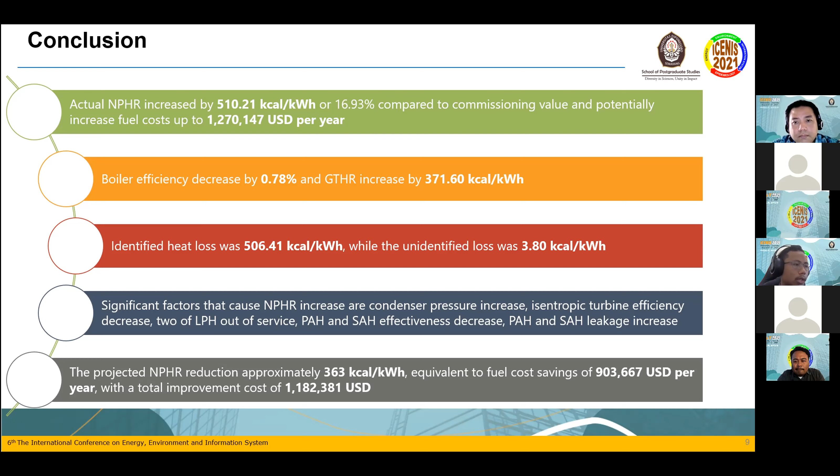Significant factors that increase heat rate are condenser pressure, isentropic turbine efficiency decrease, 2 low pressure heaters out of service, air preheater effectiveness decrease, and air preheater leakage increase. The projected heat rate reduction, if all recommendations are implemented, is approximately 360 kilocalorie per kilowatt hour, equivalent to a fuel cost reduction of 903,000 USD per year, with a total improvement cost of 1.1 million USD.

Thank you for your attention, and please, if you have any questions.

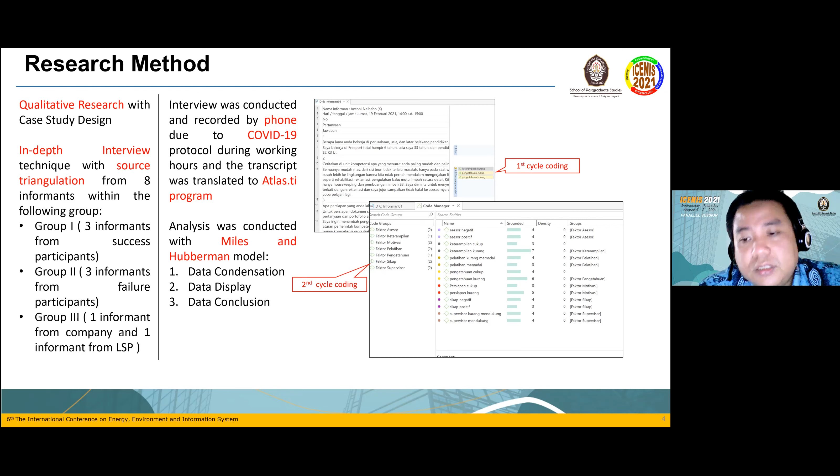After we categorize all of the first cycle coding into the second cycle coding, we need to display the results. There are two ways to display results in the Miles and Huberman method: one is matrix display, which in quantitative study can be called cross-reference tables, and the other is network display.

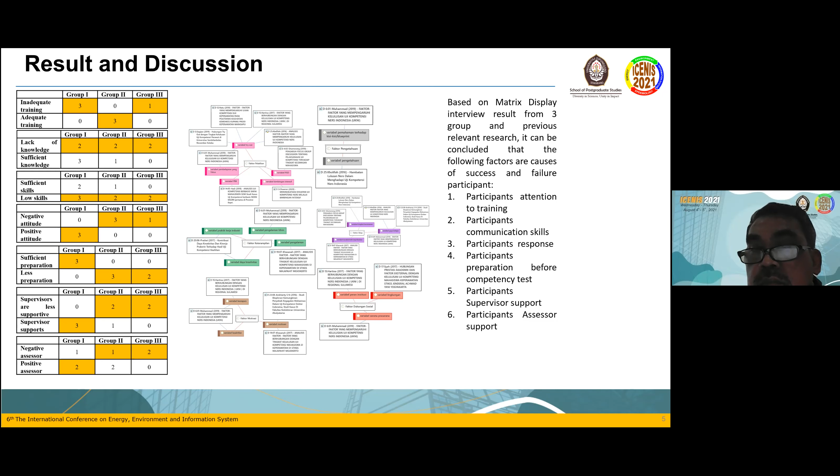If you see the left screenshot, that is the matrix display, where each factor is set against the three groups. Group 1 is the success participants, group 2 is the failure participants, and group 3 is supporting and key informants. On the training factor, group 1, the success participants, say the training is inadequate - this is strengthened by group 3, who also say the training is really inadequate - while group 2, the failure participants, said the training is already adequate.

In terms of knowledge, there is no difference. In terms of skill, there is no difference, but there is a difference in attitude: the success participants have a positive attitude, while the failure participants have a negative attitude or response to the competency test itself.

Motivation can be taken from preparation. The preparation from group 1, the success participants, is adequate, while for group 2, the failure participants, it is inadequate. Also, the success participants have support from their supervisors, while group 2, the failure participants, don't. And from the assessor who conducts the assessment, the success participants have assessors who can support and understand the field conditions in the mining.

It's not only theoretical. The failure participants in group 2 have assessors that don't understand the field conditions. In the middle screenshot, I can show you the previous results that significantly correlate with each of these factors. They have training factors, they have attitude factors, all from previous research that I collected and displayed in the network display in Atlas.

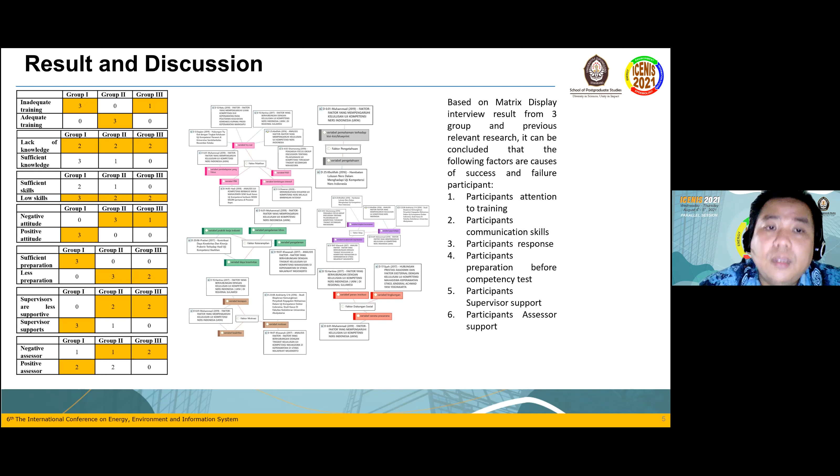So we can conclude that successful participants from the competency tests in PTFI pay attention to detail in the training. They have good communication skills in explaining their evidence or portfolio to the assessors. They also have a positive response to the process and the competency test itself. They have high motivation because they are prepared beforehand, and they had support from supervisors in terms of time, suggestions, and also assessors who can understand the field conditions and theory.

While the failure participant is the opposite of the success participant factor. They don't pay attention to the training, they lack communication, they have a negative response, they lack motivation, are not well prepared, and have inadequate support from supervisors, because supervisors always ask them to work and don't give them time to learn. And the last one, they had assessors who do not understand the conditions in the field and are unwilling to discuss. That's all, Pak Jaka.